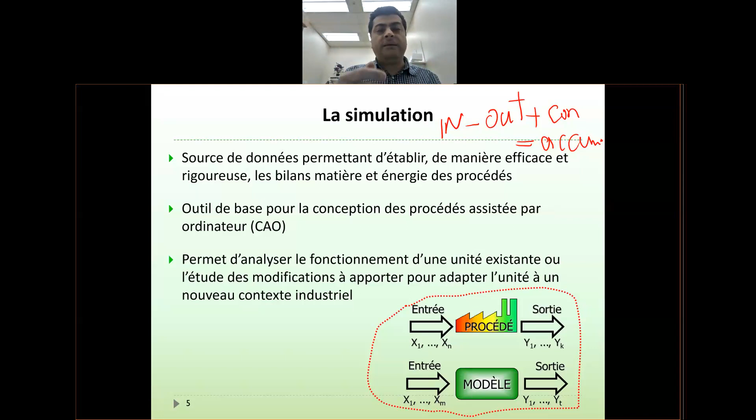you have inefficiencies. In other words, say you have a process and your boss asks, what if that specific stream, instead of going to unit number one, went to unit number two, and then from unit two back to unit one? Could the process be more efficient in terms of energy saving, for example? The best answer is to do simulation. You maintain a simulation, change your streams, change the equipment, run your simulation and see the result.

And then you can answer your boss if his idea works or not. Okay. So already I talked about this slide. I don't want to go to that detail. So you do simulation either for a factory that exists, within existence. It means a factory that exists.

Okay. So to do the simulation, you need some tools for such kind of things. The very first tool that you need to do a simulation for a kind of existing process is to have process diagrams. Okay, anybody can tell me what type of process diagrams we have? Like block flow diagram, like other diagrams. Anybody can answer? You can have a PFD and P&IDs. What is PFD? Process flow diagram. And what is P&ID?

It's more detailed process flow with instrumentation, so with all sensors and control systems. Exactly. So P&ID: P means piping, I means, as you said, instrumentation, and D stands for diagram. Exactly. So we have block flow diagram, which is very general, that just shows the layout, the sequence of the equipment.

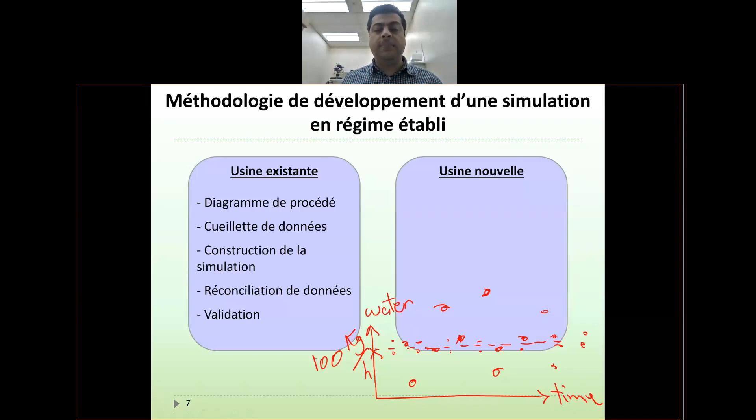Okay. If we are talking about the existing plant, we are not talking about a plant that doesn't exist. So when you have existing plants, you have recorded all data. So you have to compare your simulation data with the recorded data in order to do validation. So validation means comparing between simulation and reconciliated data. Once they are consistent, you are okay with that, so you accept your simulation data.

So once you have the validation, then you use simulation for other objectives. For example, now you have developed a very reliable simulation interface. So you know that your simulation is right. It is consistent with experimental data or factory data that you have recorded.

Now you can easily play with the configurations. If you want to change the streams, if you want to change equipment of the process, if you want to really challenge the process to make improvements or to identify problems of the process, you can use that simulation for other purposes.

But if you have a factory or a plant that is just new, okay, for this kind of plant, you know that when a plant is going to be constructed, usually we have two types of engineering work. We say basic engineering design and detailed engineering design.

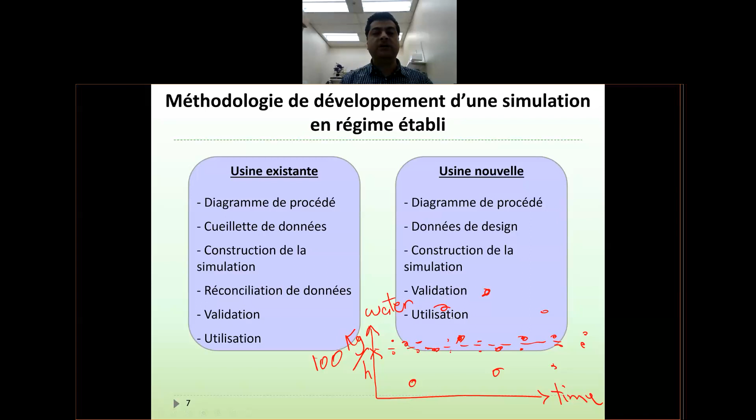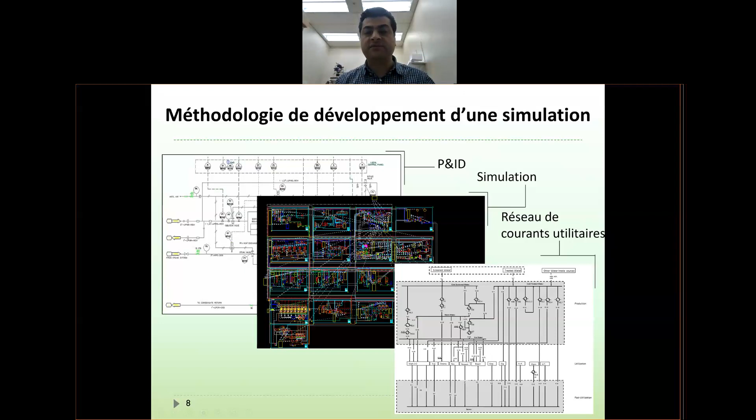So already I talked about these slides about how to do simulations. As you see in this slide, you use, for example, a P&ID for a special network of water consumption in a system, and then you use a simulation. By doing the simulation, you end up with an improved design of the water consumption. This is just an example.

Another thing in terms of simulation is that simulation can be either steady state, in French we say régime permanent, a steady state simulation, or dynamic simulation. Okay, what is a steady state simulation? What is dynamic simulation? This could be a question.

Usually, when we start the simulation, we assume that everything is perfect in the process. We are not going to have any error, any accident, any malfunction of equipment. For example, the flow rate of the water is always at a specific value of 100 kilograms per hour. So you always assume that all the data that you use are fixed versus time.

Okay, there is no variation. There is no oscillation of data recording. So you do simulation based on this assumption in order to do many things like we discussed before, for economic evaluation, for identification of instabilities, errors, for making improvements, whatever.

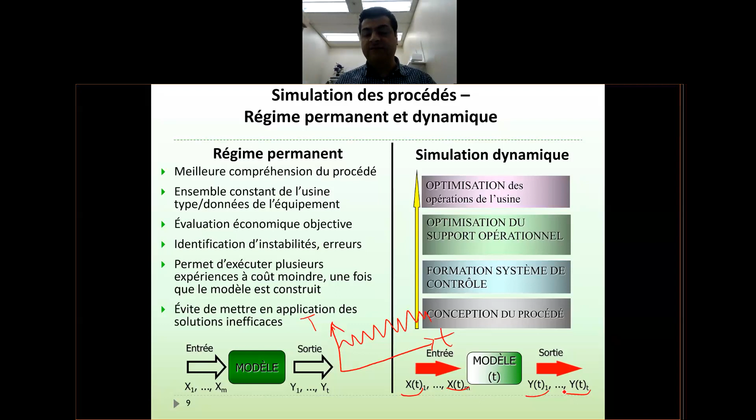Okay, I want to pass these slides because they are just easy. We talk about them more, about data collection, data reconciliation. Talking about the simulation itself, first we talk about diagram du procédé de référence, process flow diagrams. So you know that there are software like AutoCAD, Microsoft Visio and SolidWorks. There are different softwares that you can use for drawing your process flow sheets.

So personally, if you ask me, besides simulation software and programming language, another software that any chemical engineer should know is a software for drawing. Traditionally, we think that drawing should be done by a mechanical engineer or a civil engineer, whatever. No, AutoCAD, Microsoft Visio, they are extremely important. You should know them, and they are very easy. And actually, they are very fun. You can easily learn them.

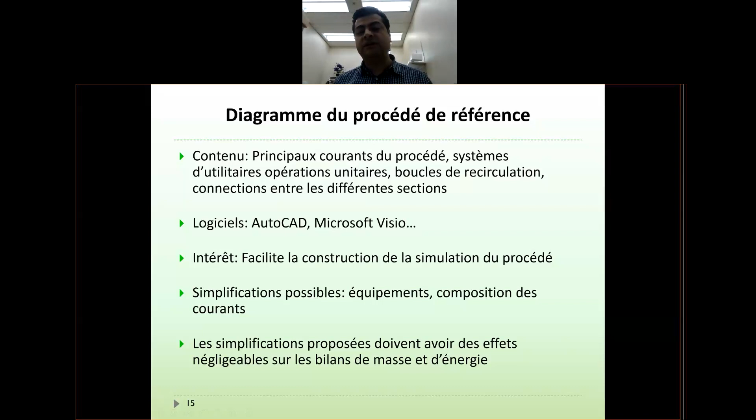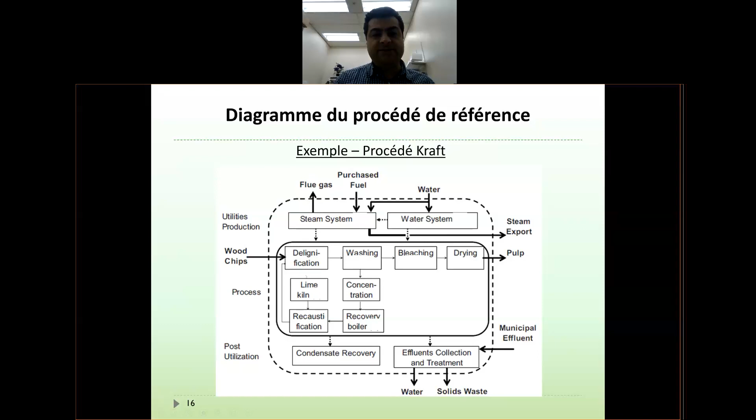So, okay, now let's talk a bit about some information that you can obtain from a simulation. Imagine this process, which is a kraft lignin process. By the way, our next biomass cafe is about the kraft lignin process. Please, because I don't want to remind you one day before the biomass cafe, go to the Plan de Cours and see when our next biomass cafe is.

I want all of you groups to really go and study the process of kraft lignin, and to really understand what the process is about and how it works, what the different steps inside kraft lignin are, because this is one of the very famous and popular processes in the pulp and paper industry, in the cellulosic industry. So for the next biomass cafe, you are supposed to provide your insights into this process. But today, I want to go through the process quickly.

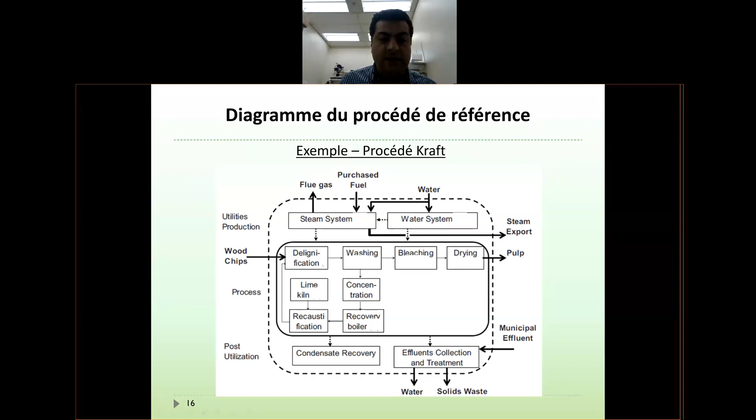So the main part of the process is here. In the process, you have wood chips. Wood chips go to the delignification step, and then there's a washing step, bleaching step, drying. After drying, the pulp is produced. But at the washing step, you have two phases, a liquid phase and a solid phase. So the solid phase here goes to concentration. After concentration, you have recovery boiler, and after that you have recausticization, lime kiln, and that's it.

But the product from the recausticization returns back to the delignification step. So you see that in this process you have different stages, and each stage includes a couple of unit operations: reactor, separator, filter, heat exchanger, whatever.

And you see that around the main process, you have also utilities. You have flue gas, you have water. This is the flue gas produced in the process, but you also have purchased fuel for the energy supply. On the other hand, you have water consumption, and you have some condensates that are produced in the process. So around the core of the process, you have utilities.

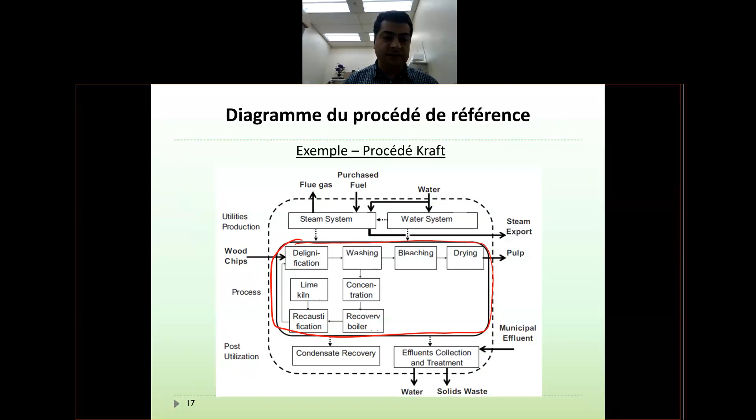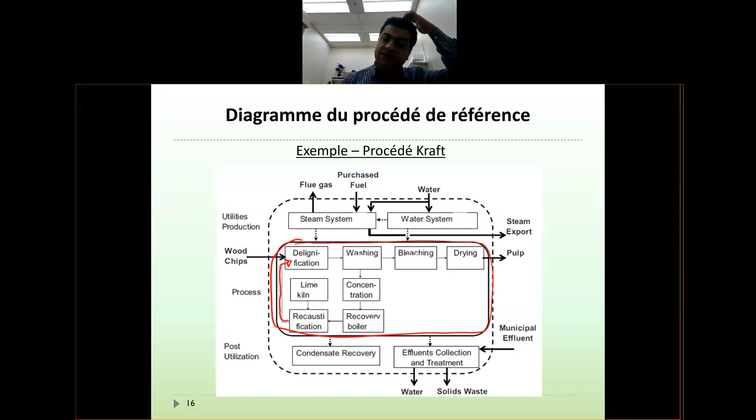But there is one specific thing you need to know, good that you know it: the problem of loops or return streams. In chemical industry, it's very common that some streams return back to the initial stage of the process. For example, in this kraft lignin process, you see that one stream here is returned to the delignification stage. This is always a common thing in simulation.

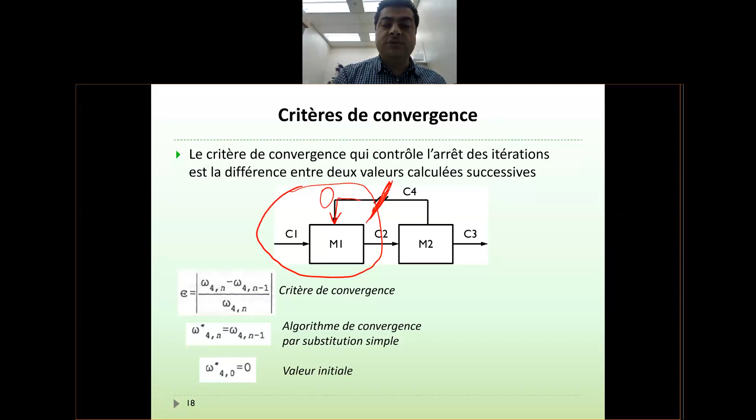You do simulation, but then once you want to simulate block M2, after simulation of block M1, you have information about stream C2. You start simulation of block M2. By doing this simulation, you get new information about the flow rate of C4.

So if you have the value of C4, let's say based on the individual simulation of M2, you get a value of 10. Then the simulation will compare this new value with the initial value you had - the value of 0, for example - that you had assumed for simulation of M1.

So if the simulation sees that the values are not consistent, it will take the value you got from M2 - this value of 10 - for another simulation of M1. Again, by taking the value of 10, simulation of M1 will be carried out.

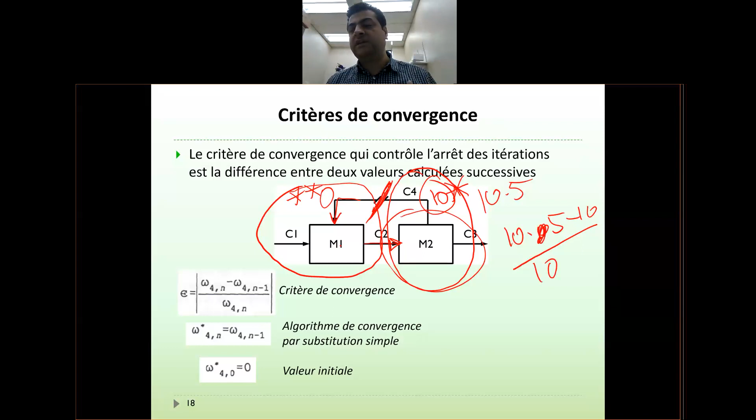Subsequently, the simulation of M2 will be carried out, and again a new value of C4 will be generated. Let's say the new value of C4 is 10.5 after the second iteration. Based on the criteria you define in your simulation software, if 10.5 minus 10 divided by 10 is a very low value, less than 5%, you can accept the value. So you can say 10.5 is the real value of C4.

This kind of iterative calculation of the loop stream is the way simulation softwares work. In this slide, a formula is given: epsilon is the criteria for the iteration. Once the value of iteration number n minus the value of the previous iteration, divided by the new value of the iteration, is below epsilon, the software assumes convergence is okay, and then it stops and goes to the next calculation.

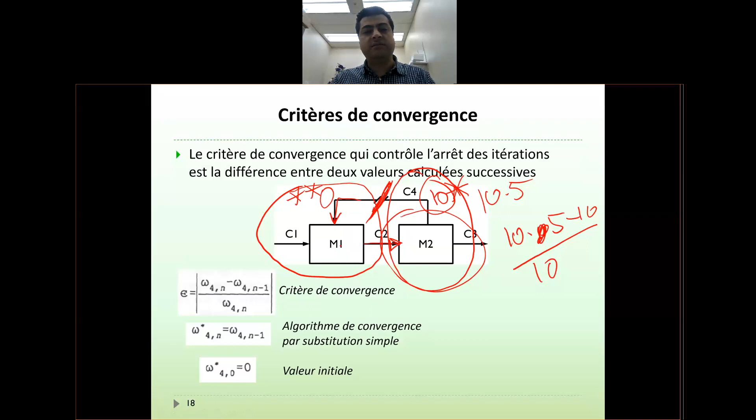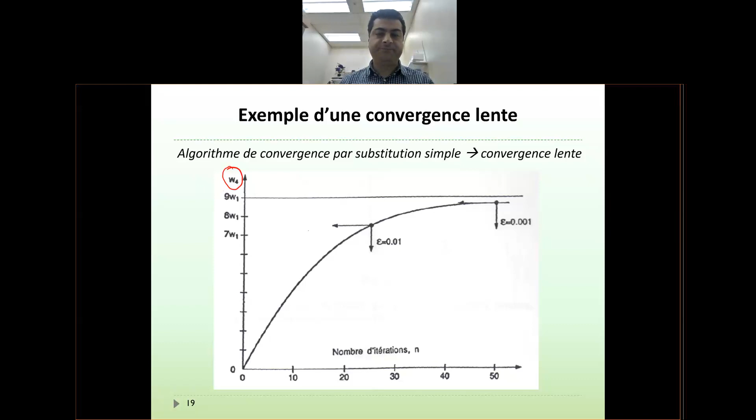When you do simulation, sometimes you don't use only one specific software. Sometimes you use spreadsheets or other simulation softwares, so you have raw data, for example from your company. You get information from data, but it's not yet ready for simulation. Once you learn how Aspen Plus works, you see that it's a software developed for specific purposes and a specific way of calculation, so you need to play with data to make it understandable for Aspen Plus.

For example, let's say you have a software that accepts temperature in Celsius, but your data from the plant is based on Fahrenheit. The software doesn't understand Fahrenheit, so you have to do a simple calculation in Excel to convert all the temperature data from Fahrenheit to Celsius, and then import that data from Excel into the simulation software.

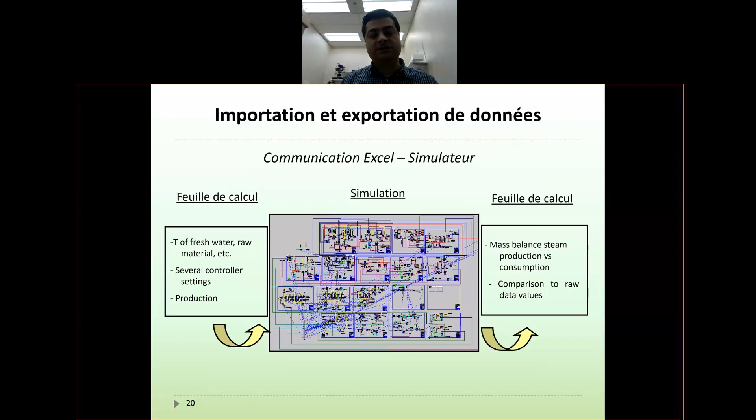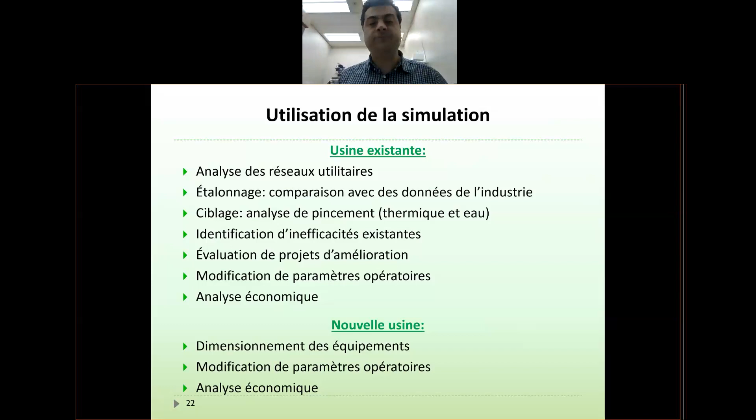About the validation of simulation, we already discussed this, so I want to pass these slides - we already covered them. Just some examples on the importance of simulation in this slide.

Since you already had validated your simulation, as we discussed before, now you can trust this data, because you have validated that your simulation is reliable. After that, you use the simulation for identification of issues in the process - so by looking at this data, you trust your simulation.

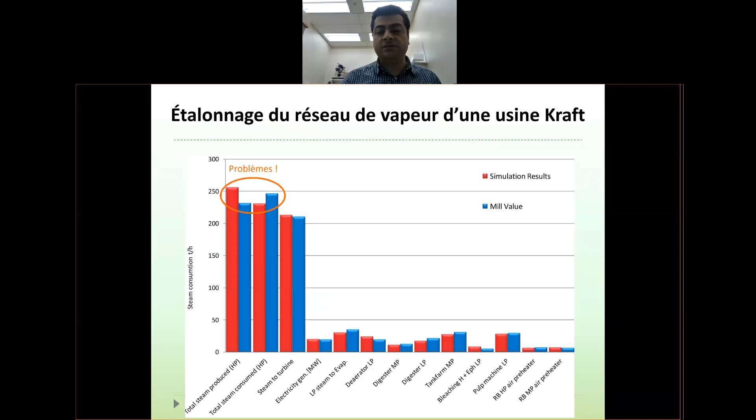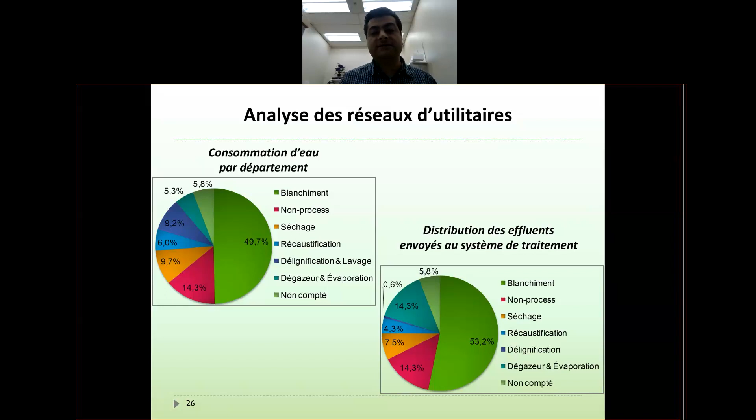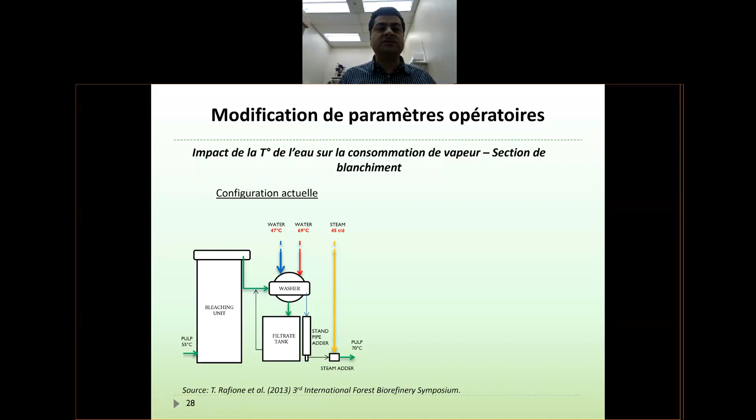But by playing with your simulation environment, using your creative tools and your engineering knowledge, you can end up with some simple improvements. For example, by just increasing water temperature to 57 and 79, you see that the flow rate of the steam has decreased from 45 to 38 ton per day. So it's a considerable reduction of the steam production.

So, of course, you might ask, what is the trade-off here? After this kind of simulation, you should also do techno-economic calculations or evaluations to see if it is worth it or not to increase the water temperature in favor of lowering the mass flow rate of steam.

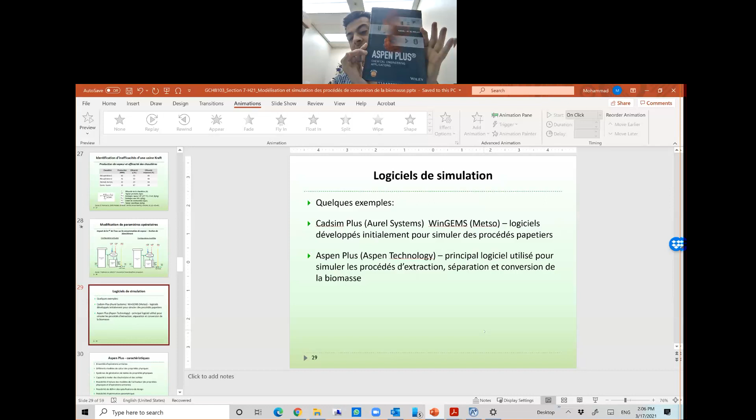But also we have put three references for Aspen Plus in order to get familiar with more details of Aspen. But as I said before, I really think that this book is really good. That is a really good book, and it can really help you to easily understand how Aspen works.

So basically, now we would like to talk about Aspen. This is the last part of the course. I don't think I can finish today, but I will talk about it maybe in the first half an hour of next Tuesday.

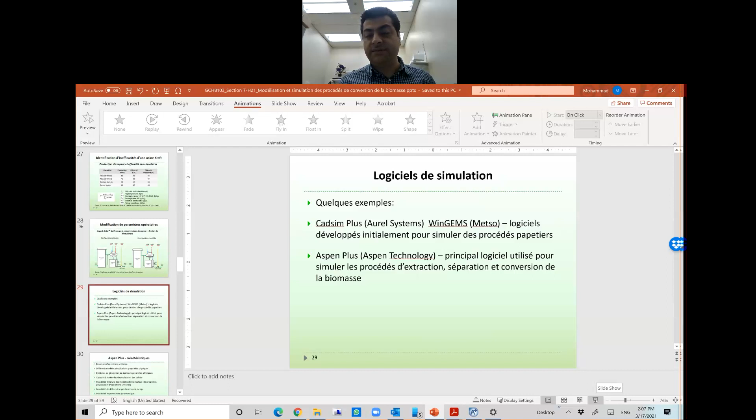So in terms of process simulation, you know, as this is, always I have an issue with this.

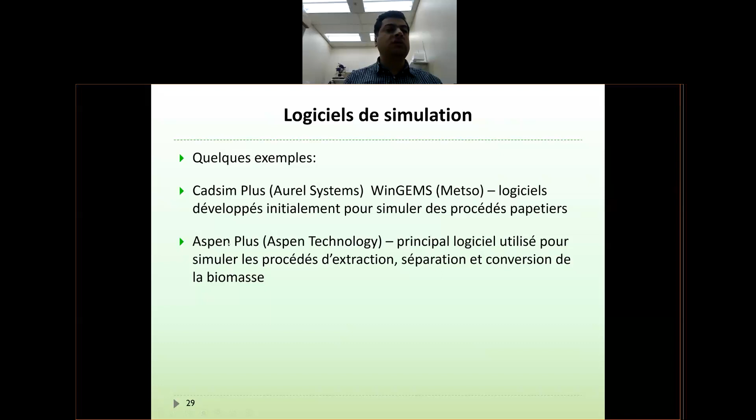So in terms of simulation, there are different softwares that we discussed. There are some simulation softwares like Cadsim Plus or WinGEMS that are specific for pulp and paper, but there are some more inclusive softwares like Aspen Plus, HYSYS, Pro II, and some others that exist.

Okay, so Aspen Plus is one of the most important softwares. I'm not advertising the software because it's not my product, but as a tool, it is a very important, very good simulator because, although it still has some limitations, it includes many things in terms of equipment, property packages, in terms of material.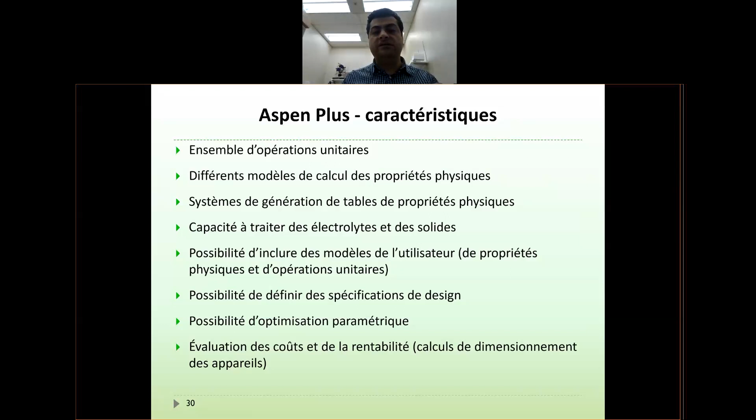For example, some softwares are not good for simulating solid material, the solid part. They are mostly for gas and liquid systems. But Aspen has the strength of understanding what a solid is. This is one advantage of Aspen. There are some studies here, but I will go to Aspen itself directly.

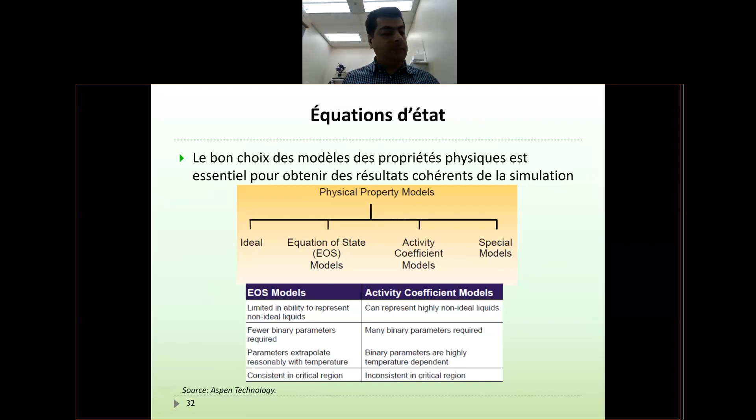Before, let me talk about something very important. So any simulation is based on some specific input. For example, what type of material you have and what kind of energy you are going to use in the system.

But beside material and energy information in your simulation, in my opinion, the most important input information that you should provide to your simulator is the thermodynamic method, or in other words, in Aspen they say property package. Why? Because, as you know, I'm sure all of you have passed a thermodynamics course.

If you haven't studied thermodynamics before, I strongly believe you should go and study thermodynamics, or even if you have studied it and have forgotten, you really need to know the principles of thermodynamics, especially those sections about phase diagrams, equilibrium information, and this kind of thing. Because simulators are heavily dependent on the thermodynamic packages that you use.

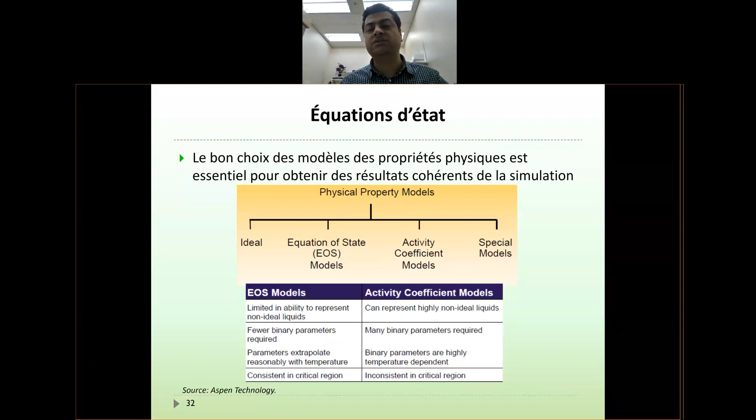Okay, so here just two classes of thermodynamic packages are mentioned: equations of state like Peng-Robinson and Redlich-Kwong-Soave, and models based on activity coefficients. I really want you to know at least the difference between equations of state and models based on activity coefficients like NRTL, UNIFAC, UNIQUAC, and Wilson.

For example, if you are in conventional oil and gas systems, Peng-Robinson or Redlich-Kwong-Soave are the most popular thermodynamic packages. But if you are dealing with a process where the liquid phase is very important, and especially your system is not an ideal system, and you have a specific dilution, for example, this is where you need to really understand what kind of thermodynamic package you have to use.

Regarding biomass, Aspen essentially was developed for the oil and gas industry, but now Aspen is more robust. It includes several industries. Fortunately, since 1996, people who work at NREL developed a library for Aspen so that Aspen now can identify some biomass components. Because it is really a challenge to define a component in simulation.

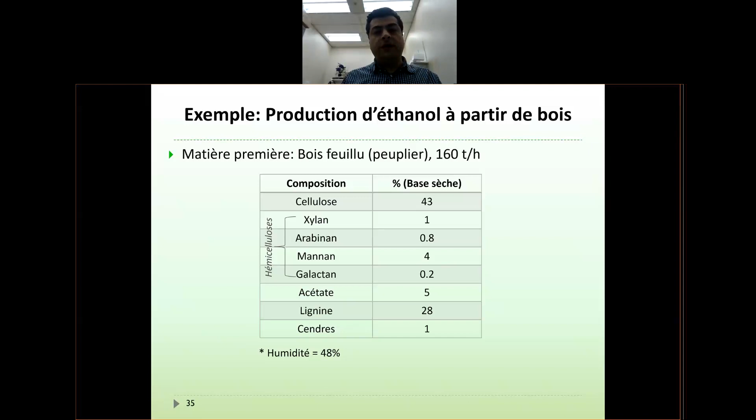Okay, so as I said, this slide and the next slides are about a process for production of bioethanol from biomass. I don't want to go through these slides because they are fairly easy. You can really understand. It's just about identifying different sections of the process: pre-treatment, detoxification, conditioning, fermentation, and separation.

As I showed you in the module, this article already exists in the module. I want you to really go and study this article. You will easily understand this process, because otherwise I would have to spend one day going with you through the details of the simulation. But you can follow the slides and see what type of assumptions are made.

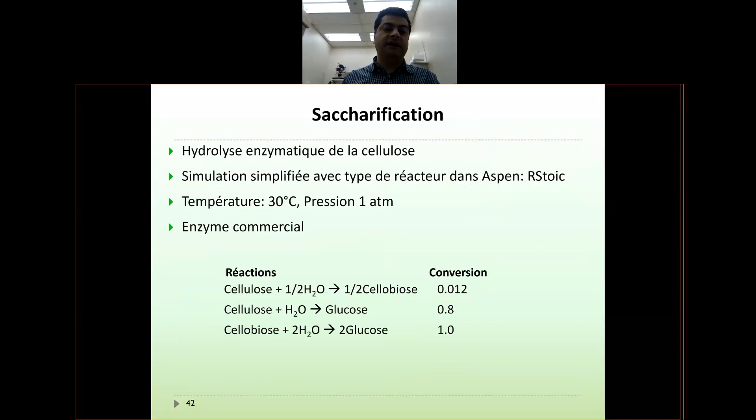But what I want to really emphasize here, since especially in biomass conversion ethanol production is one of the top topics, is the separation point in biomass conversion.

Okay, this is extremely important. It means that if you want to separate water from alcohol in order to enrich concentration of alcohol, you cannot operate your system around the azeotrope point. Okay, you have to always operate at temperature far from azeotrope, so you can have this kind of separation.

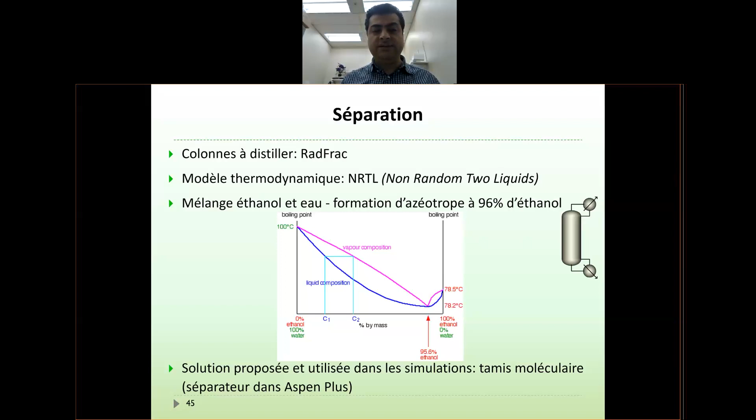Okay, so besides that, what I want to say is, back to this process that I left for you to study. When you face this situation that you have to do distillation, but you have an azeotrope, you don't have the chance to separate alcohol, for example, from water completely. So you have two ways. One way is to have a fractional distillation, for example. So you do a distillation first, and then the mixture goes to a second distillation. So by this kind of fractional distillation, you recover all the alcohol from water.

But in this specific case, for example, you see they use molecular sieves. So they use one distillation, but after that, the mixture of water and alcohol goes to a molecular sieve, okay, to adsorb the water, and then alcohol will be free. So I just wanted to emphasize the importance of simulation.

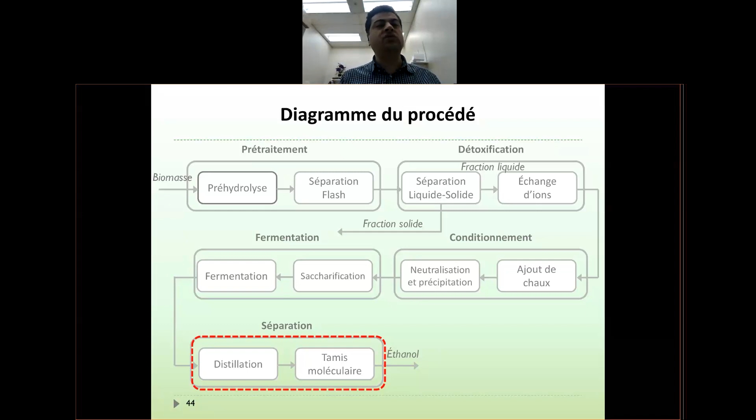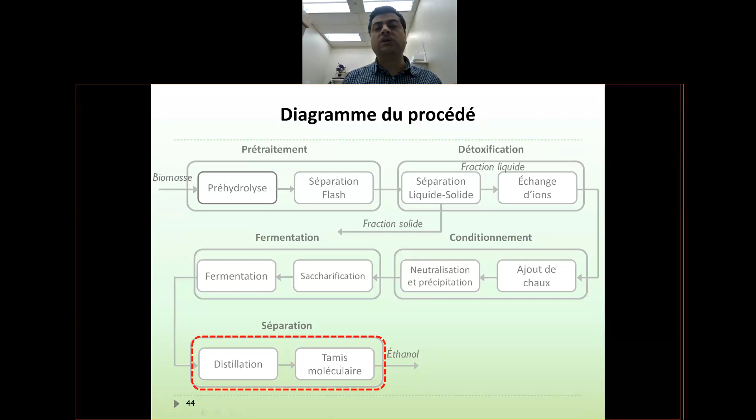When you do simulation, you can easily understand. I mean, simulation itself can tell you that at this specific point you have an azeotropic point. So, since you have software in front of you, you don't need to go to lab and practice fractional distillation experimentally. You can either do a fractional distillation inside simulation software, or distillation plus other types of separation, including molecular sieve. Okay, so this is about simulation.

As I said before, when you do simulation, it is very common that you have one main simulation software like Aspen, but you can have other software like Excel and CADSIM Plus, for example, in order to get some information from one software and import it to the other one, and then export the information from that one to the first one. And by this kind of loop, you want to really make sure that you have a very strong simulation job.

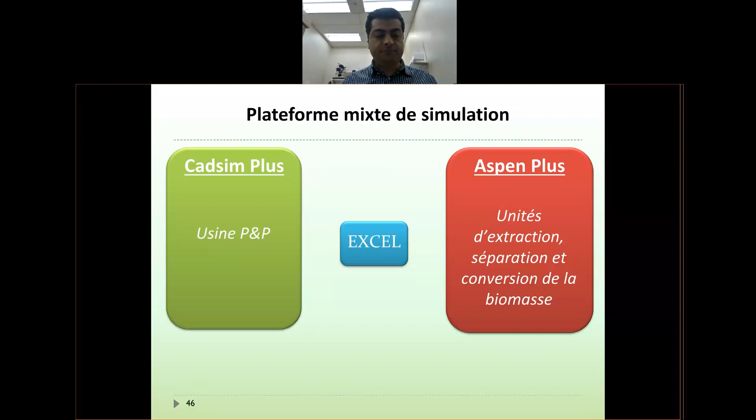So there is one section about process scale up. I leave it to Tuesday because otherwise the message cannot be complete today. I just want to go to Aspen itself.

So do you see my? Can you confirm that you see my screen? Yes. Yes. Okay.

So talking about Aspen, I just want to give you a very quick introduction to Aspen itself. By the way, since you are all students of Polytechnic, you have free access to Aspen. Ariane, I think, sent you an email on how you can have access to Aspen from home, because otherwise you cannot use Aspen. So click File and then New.

Okay. See, this is the advantage of Aspen. It already has categorized simulation environments depending on your process: air separation, chemical process, electrolytes, gas processing, metallurgy, pharmaceutical, polymers, refineries, solids, or any environment that you would like to manipulate for your own. Okay, so let's say I select chemical processes.